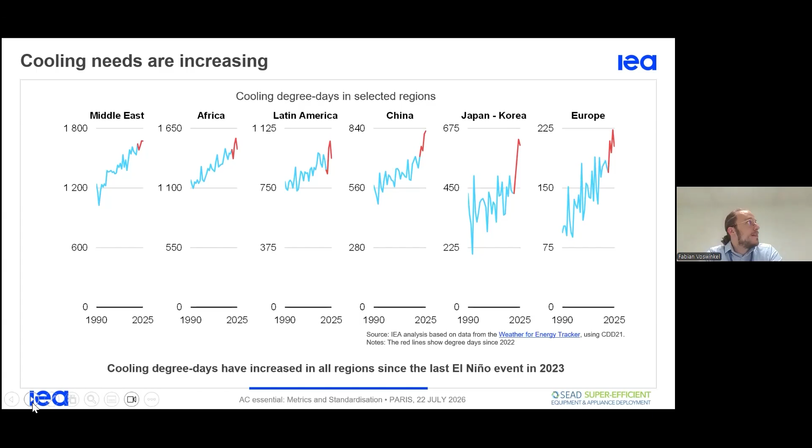So on the other side, air conditioners are being shipped, sold, and bought more and more across the world. We see in this left chart on the next page: from 2020, when there were just over 150 million units shipped, and in 2024 it was like the record where it hit about 200 million already, where in this year there was a tremendous growth in India, the Middle East, the US and Europe of about 10%, and about 40% in Latin America and Africa. So a strong growth there.

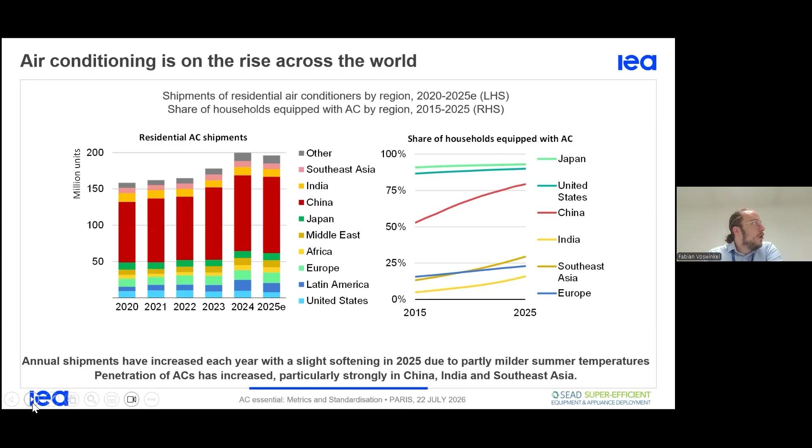And then also, what does it mean in terms of households? How many people do have air conditioning? We see already very high rates in the US and Japan of around 90%, and that has been relatively steady for a longer time. We saw a rapid growth in China, going from just over 50 to almost 80% over just 10 years. And also regions like India and Southeast Asia have been growing very much in terms of air conditioner penetration. So that of course means the needs are there, and the growth is coming along with it, and that very much increases the energy demands.

On the next page we see it: at the moment we saw a growth, not shown on the slide, of about 50% from 2015 to 2025. So that's quite a bit more, and it's now at around 2,900 terawatt hours, which is about the same amount as the entire electricity demand of the European Union, so that's quite significant. And it is bound to increase by another 1,600 with current policies over the next 10 years. And if we then see more heat waves, that's the sensitivity case in our model, we can expect another boost of 50%. So cooling demand rise is very, very high, and it has to be managed right.

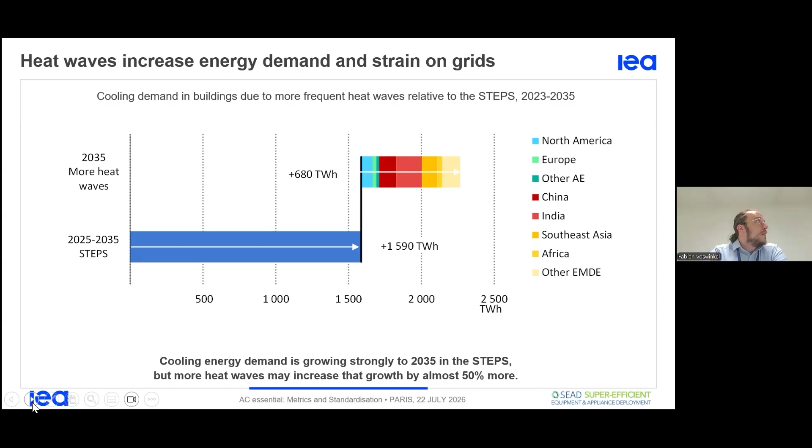So this is where we get to on the next slide. And very much as also Georgia in the first presentation has talked about, there are different ways of coming by this, and it is very much systemic actions. It's not only reducing or working on the air conditioners. So it starts of course on big national plans, but then in practical measures on an urban level, the urban heat island effect is very real. It can mean that in urban centers it can be up to 10 degrees centigrade higher than the rural areas.

So that's very much. Mitigation actions include green spaces, bodies of water, greening of the streets, and unsealing of pavement to have evaporation in the street. Each of these can reduce the temperature by up to 5 degrees.

For buildings, the orientation and shape can be adjusted, along with insulation. There are many things that can be done to decrease heat gain, and passive measures like shading and ventilation play an important role in bringing down the need for active cooling as far as possible. Individually, this can be combined with fans to bring down that demand.

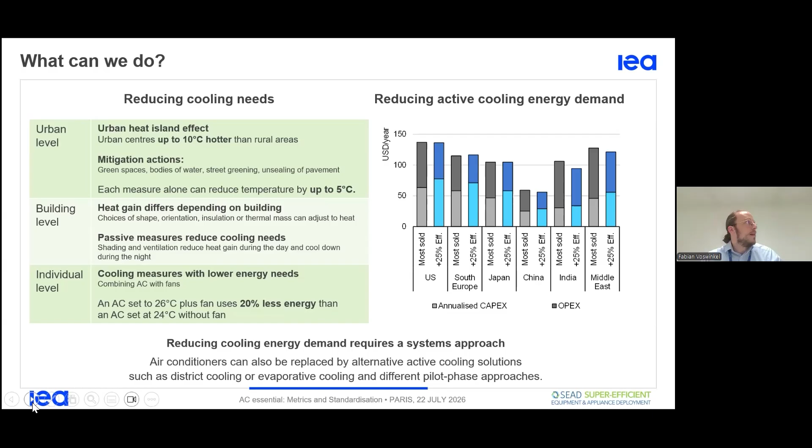Still, there will be air conditioning, and that has to be as efficient as possible. As we see here on the right side, the upfront cost of a 25% more efficient unit, plus energy cost, is generally lower in most regions than the baseline most-sold model at the moment, which can decrease grid pressures.

On the next page, we have run analysis here at the IEA where we had people in three regions—Southeast Asia, Latin America, and Sub-Saharan Africa—go into shops and look at the energy efficiency of devices being sold there, and what the prices of these were.

What we found is that in all of these regions, you can find a much more efficient model for roughly the same price as the less efficient model. So it's really down to choice.

So how do these two things go together? On average, the more efficient model does cost a little bit more, but you can also find the more efficient model for the same price as the less efficient one. How do these two go together? Our colleagues from 4E have done a very good analysis on this.

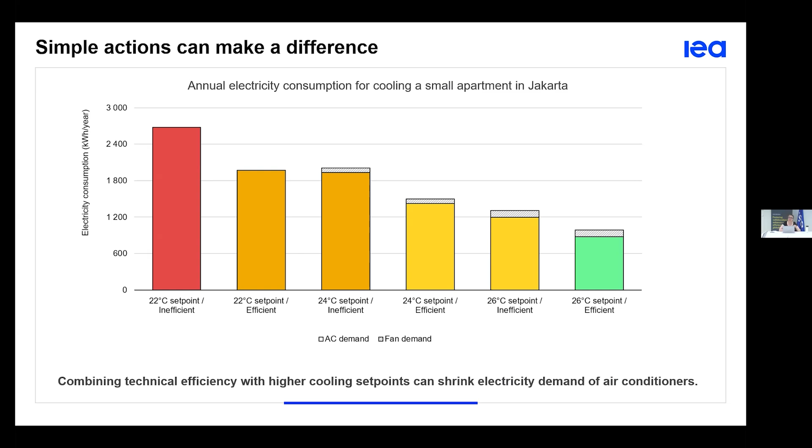So in the next slide, the first point is to remind, especially in times of energy crisis, that simple action can really make a difference. This slide shows that if you choose efficient appliances, efficient ACs, and set their temperature at a reasonable point, and even add the consumption for a fan—this is the little bar at the top—you can half the consumption or more for air conditioners if you find a good appliance and set the temperature at 26 degrees instead of 22 degrees.

So there are behavioral aspects in the choice of appliances and in their use that can really make a difference. The second aspect is that energy efficient appliances, and air conditioners in particular, are very beneficial and profiting to consumers.

If you look at the overall cost over the lifetime and separate the upfront cost when you buy it—this is the bottom of the bars—and the cost in electricity over their lifetime, the efficient appliances on the right are more profitable. It costs less to consumers.

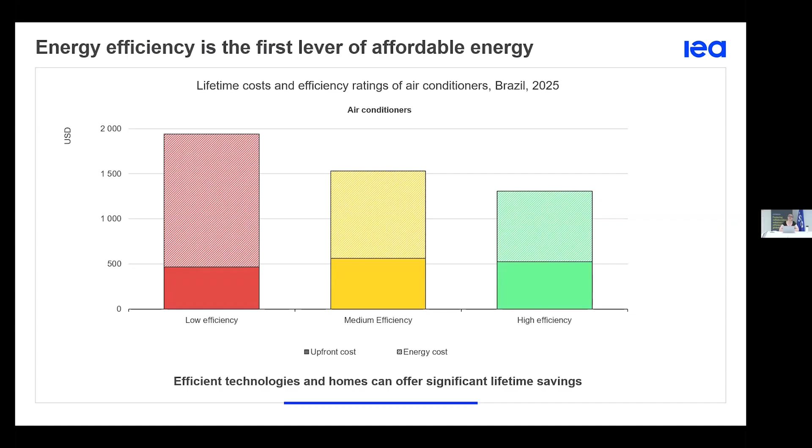And actually, if you even look at the upfront cost, it's not that different between a low efficiency model and a high efficiency model. We saw last week in our research at the IEA, from market data, that with the same amount of money, it is possible to buy an efficient model or an inefficient model on the market.

And lastly, we also know that peak loads are highly impacted by air conditioners. This graph shows that for one additional degree in temperature in India, you have a huge difference in the peak load requested to have all these ACs working. But you also see that thanks to energy efficient air conditioners, you could avoid several gigawatts of peak loads, and this is really critical for energy security so that the grids are stable.

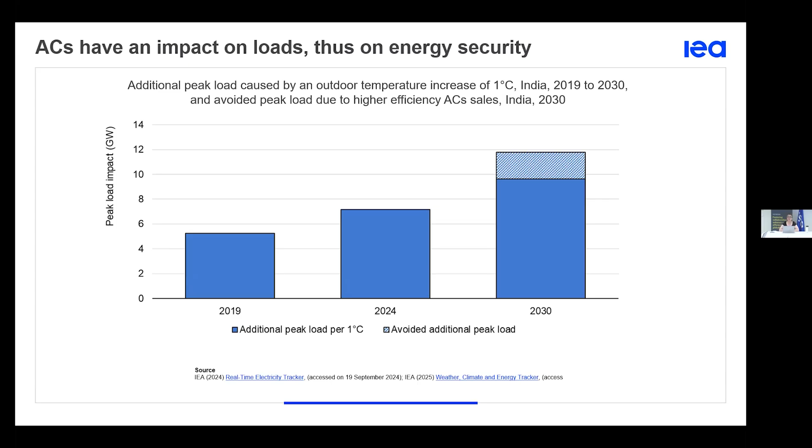So with this in mind, let's go directly into the topic, and I will hand over the floor to Jerry George.

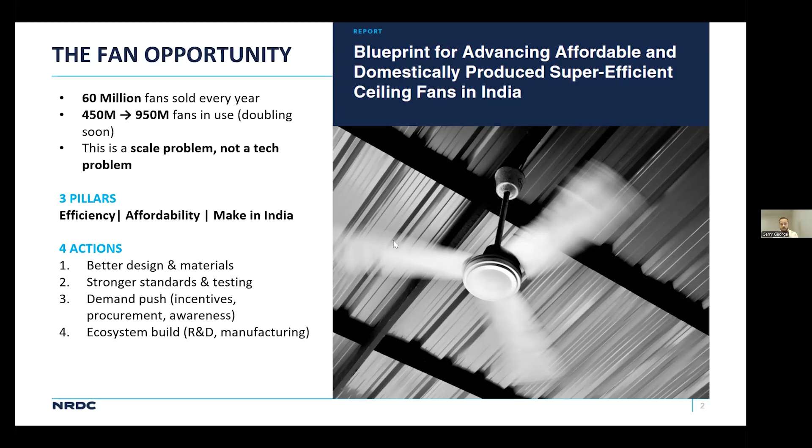All this is about changing the whole market. So if we get this right, we can reduce electricity demand at scale, lower electricity bills for households, and strengthen India's manufacturing base. And most importantly, this blueprint is based on extensive consultation with industry, government, academia, and other stakeholders, so it reflects what is practical and achievable.

So let me briefly talk about where the technology stands today. There are two motor technologies in the market. The first is induction motor, which is reliable and low cost but less efficient. The second is BLDC motor, which is much more efficient but still represents a very small share of the market currently because of its higher cost and some durability concerns.

Today, induction fans typically reach a service value of about 6, while BLDC fans can reach around a service value of 7.5. Service value is the measure of how much air a fan delivers for every watt of electricity it uses. The Bureau of Energy Efficiency in India baselines around 210 cmm of air delivery, so that's the reference we are using across this analysis.

The important point is that the technology has much greater potential. Improved induction motors can reach around 8.4 service value, while optimized BLDC motors can reach about 10.5 service value. That's roughly 40 to 75% improvement over where most of the market is today, which is around 4 to 5 service value.

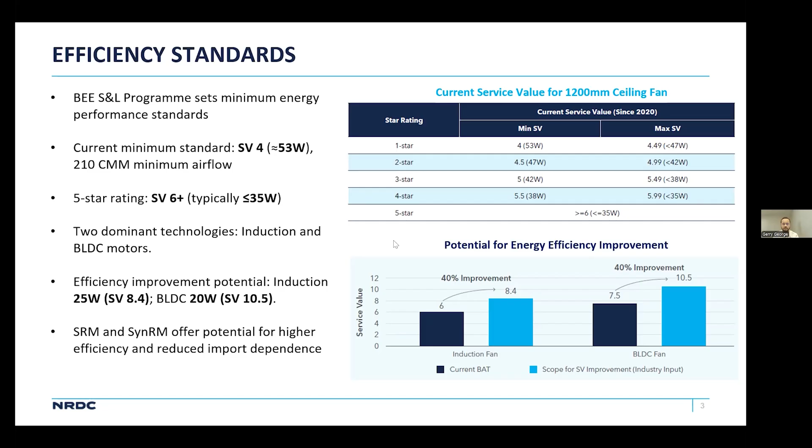Today, most of the 5-star fans are BLDC models costing around 2200 to 2500 rupees. Our goal is to bring that performance down in cost while making it affordable at scale.

One of the things people often ask is whether we can replicate the LED program in India for ceiling fans. I'd say the opportunity is certainly huge, but the challenge is more complex because fans require change across the entire value chain. In terms of affordability, most consumers still buy fans based on the upfront price, so financing or incentive programs may be needed.

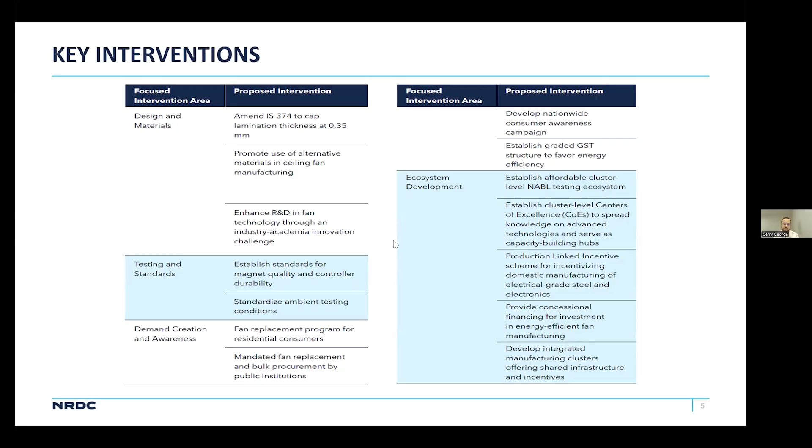That's very interesting, I hope the Indian government follows the whole plan that you have prepared. I really like fans.

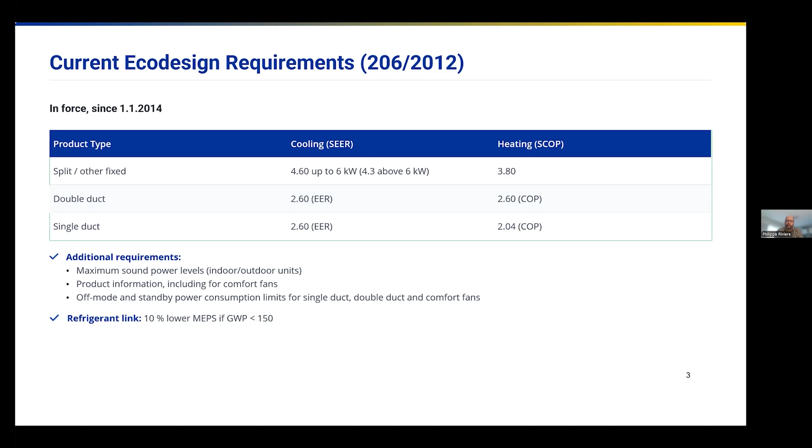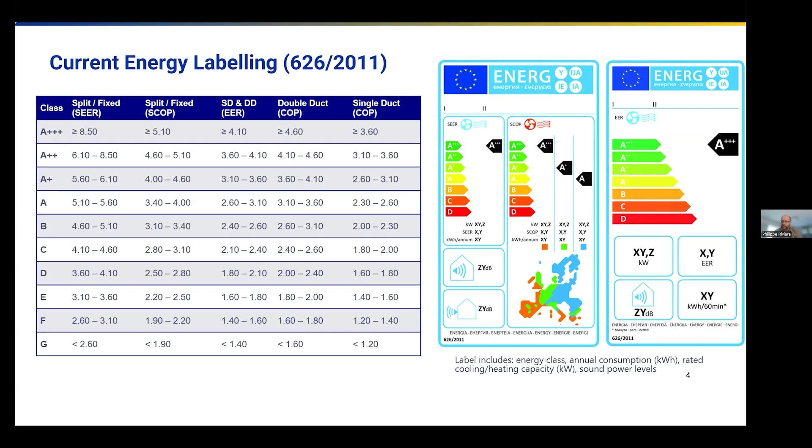Together with these MEPS was an energy labeling regulation, which is still in force. Specific scales were tailored for the different metrics, seasonal on one side and nominal on the other side, so you can see there are 5 scales for heating and cooling. In the specific design of the label, we advertise the kilowatt needed to design the appliances, the efficiency, but also the noise and the indication of performance for different zones for seasonal metrics, because of the large variations.

We started the evaluation of these policies a few years ago. The first thing is to evaluate how far they were effective and efficient. In terms of effectiveness, they behaved as expected, with relatively important savings given this still small end use in Europe. This is only because the measures were taken with main effect in 2013 and 14, so it's only half time of the product lifetime, and these gains are still increasing significantly.

But in the evaluation, we see there is potential for improvements, and we plan to update this regulation to make it more stringent, and also update it with technological progress. In particular, we see a significant difference between real life behavior and what is evaluated in the metrics.

First, for the portable air conditioner, the single duct, the infiltration effect is not accounted for, and this, in particular when it's very hot outside, has a large effect on the ability of the product to cool the house. It's also detrimental because single duct and double duct are not treated the same way, which modifies the market deeply. So we need to correct this and integrate the infiltration, probably by adapting seasonal metrics also for portable units.

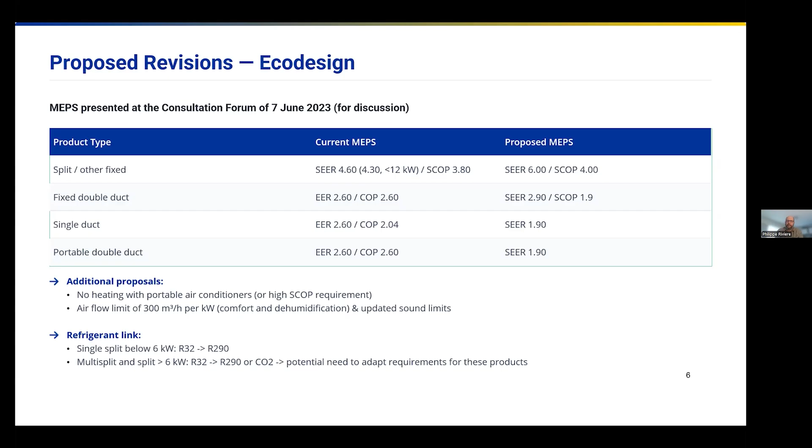There is a specific topic still being debated, which is the link with the refrigerant, because the F-gas regulation, which is progressively banning high GWP refrigerants, has a strong impact. Most of the products on the market today will not be on the market tomorrow. They will have to move progressively to R290, propane, or other natural refrigerants. For some product segments, such as multi-split and large splits, there is not yet a product on the market, which makes it more difficult to plan for these future requirements. So we are still debating on these points.

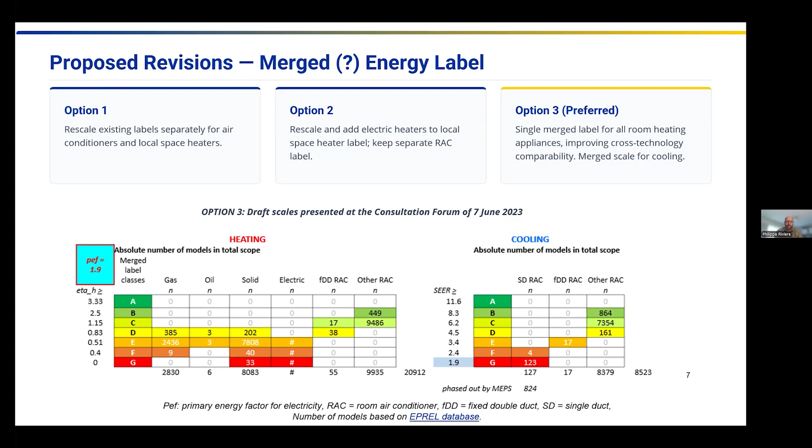And again, it's still being debated. You can see here some specific scales which were proposed in 2023 for discussion.

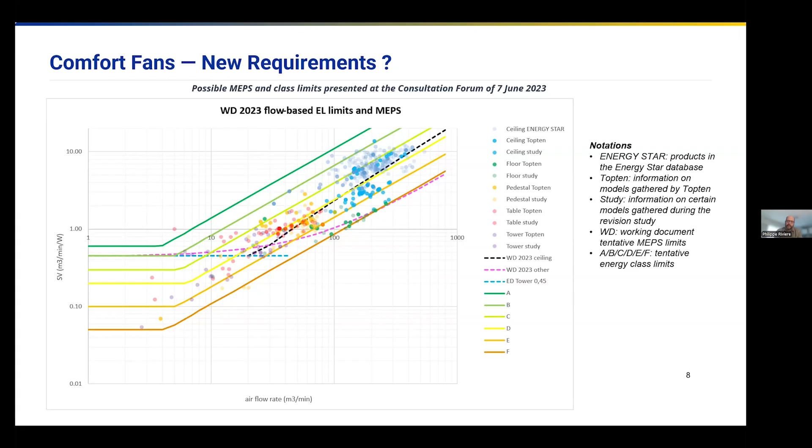For ceiling fans, which are much more efficient, there are different requirements, and then for all types except tower fans, you can see different lines there. So this is only a proposal being discussed, but not yet the final values, of course.

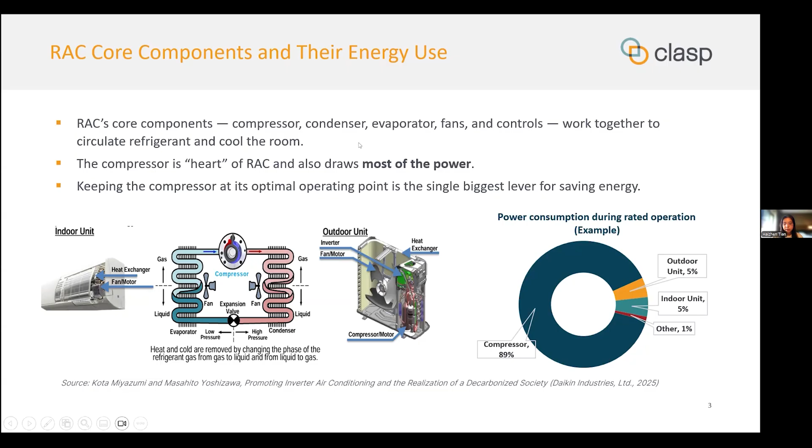During a rated operation, in traditional air conditioner manufacturing, the goal was fairly simple: achieving energy saving meant keeping the compressor in its optimal operating condition. But as technology has advanced, our range of options has grown well beyond that one component. So let me turn to the next slide to discuss how technology is driving efficiency improvement across the whole system.

How do we actually make an air conditioner more efficient? Broadly, there are two main technology pathways. The first is component upgrade, improving the individual parts. That means advanced compressors and inverters that can run smoothly even at low speed. Second is larger, better designed heat exchangers using superior materials and refined tube designs. The third aspect comes from high-performance DC motors paired with efficient fans that can streamline airflow and cut turbulence.

In addition, as also mentioned by Sophie, smart sensors together with expansion valves can fine-tune refrigerant flow as cooling demand changes. But there's an important shift in recent years: the focus has moved from optimizing one component at a time towards another pathway, system-level optimization. This is where the real gain now comes from.

Instead of just fitting a better compressor, in this pathway we match and tune all the high efficiency components to work together. We also add smart controls and AI algorithms that predict cooling demand and optimize the machine's operation in real time, even responding to signals from the power grid and ambient temperature or climate. Personally, I believe that as we push AC efficiency higher, system-level thinking will only become more important. It's no longer about one better part; it's about the whole system working intelligently as one unit.

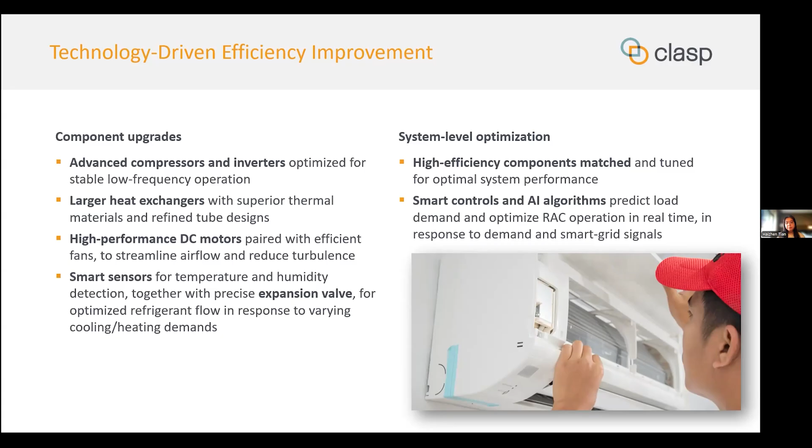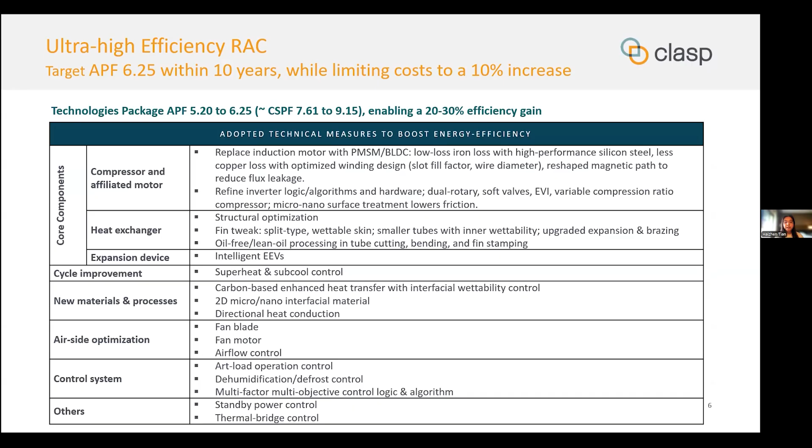Thank you very much, super interesting. I really love to hear that everything is already on the market and nothing new, no research needed, no time to be lost. So we hope that indeed the policies will follow up and will be ambitious to support these appliances. Thank you again.

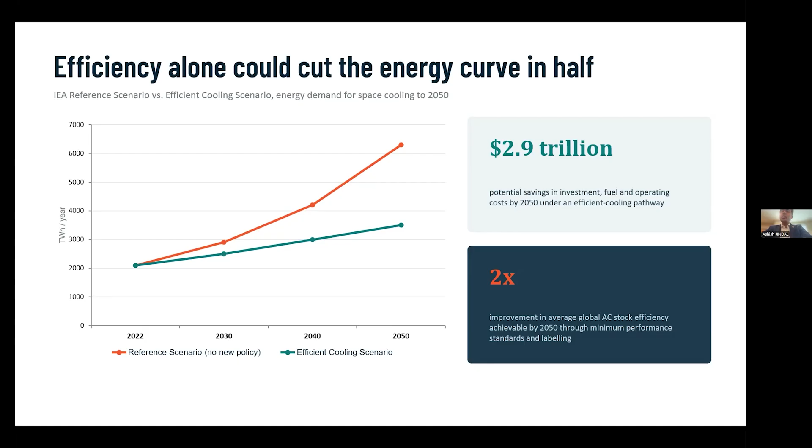So this $2.9 trillion in avoided investment, fuel, and operating costs represents a 2x improvement in average global AC efficiency, achievable just through MEPS and labeling.

Today the AC stock sits mostly in China and US, but the next wave looks completely different. Southeast Asia stock is set to grow ninefold between 2020 and 2040 under current policy settings. Over 80% of new electricity demand through 2050 will come from emerging and developing economies. That's where the work we do matters most.

It's not about total energy alone. As we get into how energy gets used, New York's evening electricity peak jumped 90% above its off-season average during last year's heat waves, when AC ownership is high. Similarly in France, although there is lower AC ownership, there's a 25% jump in peak demand. In India specifically, peak electricity demand rises by 7 gigawatts for every 1 degree Celsius of warming. And if every new AC sold through 2030 were high efficiency, we could cut peak load growth by 20%. So replacement is not only a bill saving story, it's a grid resilience story.

SEforAll already works on this. We are supporting National Cooling Action Plans in various countries. We are supporting the Global Cooling Pledge. We are running cooling efficiency marketplace workshops in Ghana, Kenya, and Nigeria, and developing heat action plans for 8 Kenyan county governments. Already we have mobilized more than $300 million in cooling investment, and that brings the track record to India.

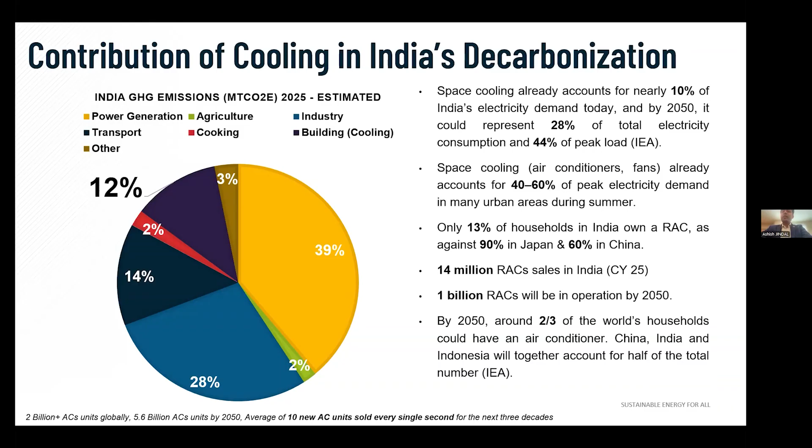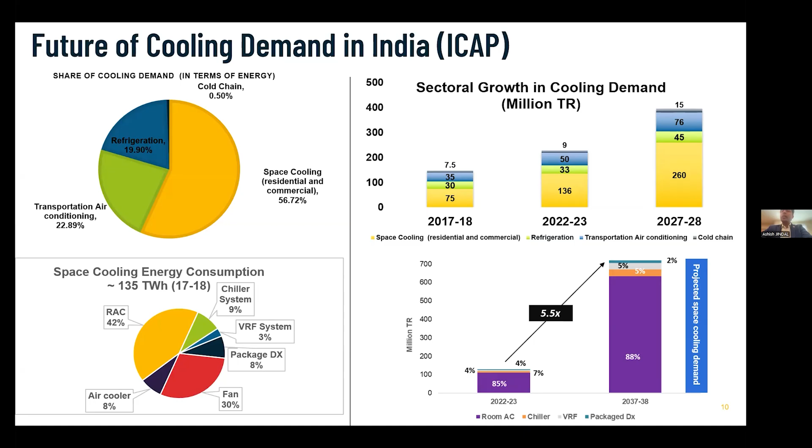India's cooling action plan breaks this down clearly. Space cooling is 57% of total cooling energy demand, ahead of transport AC and refrigeration combined. Sectoral cooling demand roughly triples across categories between 2017 and 2028. And if you look specifically at space cooling electricity use, about 135 terawatt hours a year today, room AC alone accounts for 42% of that, which is the single biggest lever we have today.

This is not just the analysis, it's already a policy direction. Last year we worked on the National Conference on Sustainable Cooling, where we identified 2 clear priorities: one is to undertake a replacement program, and second is to develop an innovative financing model to drive market transformation.

So here is the opportunity. Out of about 18 million AC installed, 60% of them could be 10 years old, which could be inefficient, and those could be replaced with 5-star and more efficient units. Also the refrigerant could be replaced, and that could give 48 gigawatts and $6 billion of savings through this.

Here's the concrete place to start. We are already in conversation with PSU townships across more than 370 public sector undertakings and about 800,000 plus residential units. There are about 1 million old room ACs in operation. Swapping them over for 5-star rated units would save significantly in electricity cost and payback, along with the refrigerant.

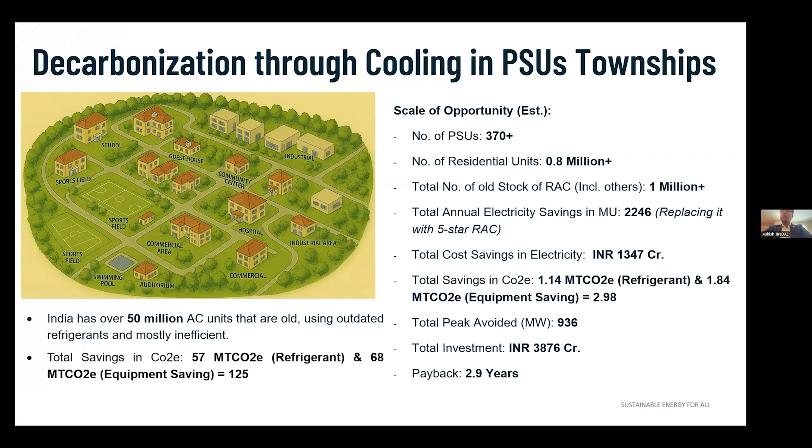So it brings us together that the technology already exists, the savings are proven, and the policy direction is set. What we need now is finance for a replacement program to start with PSUs and townships, and to scale nationwide and globally. I'll pause here and hand back to Sophie, and you can reach me at my email.